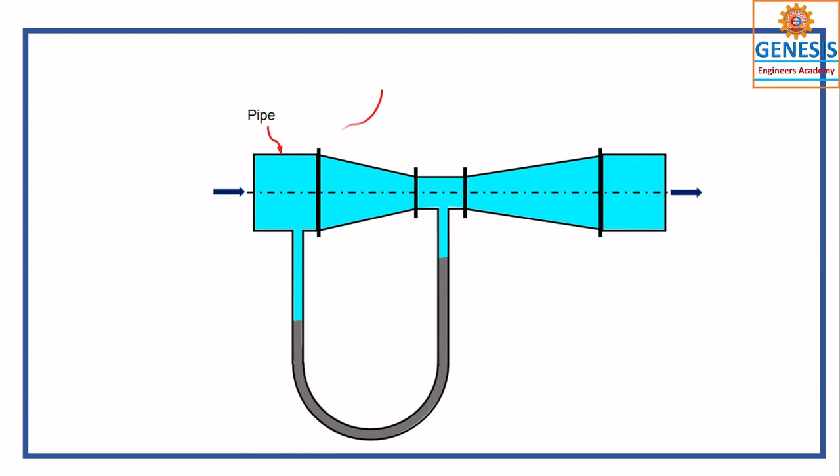In this video, we are going to discuss discharge measuring devices called Venturi meter. It is a device used to measure the flow using a theoretical formula.

This entire part is called Venturi meter. This part is assembled between two pipes, so the pipe length may be longer.

The Venturi meter initially primarily consists of a converging cone, throat and diverging cone. Converging cone, throat, diverging cone.

Together we call it Venturi, and these thick lines show it's a flange attached to both the pipe as well as this part of Venturi, and this is another part. These three parts are connected with the flanges called pipe flanges.

Next, this is a U-tube manometer. You can also call it a differential U-tube manometer. It gives the difference of pressure, the pressure difference. This is called pressure head.

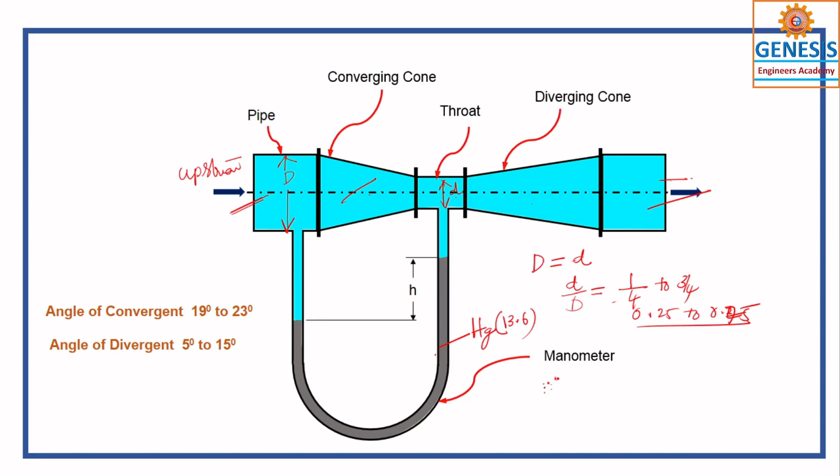This is the manometer, also called a differential pressure head measuring manometer. The manometer is used to measure the pressure difference and single pressure for that matter.

Here, one more thing I have to tell you: this throat diameter and its height, or otherwise diameter and length - suppose the pipe is like this one, throat, its length is also d and its diameter is also d.

d varies between, that is d by D varies between 1 by 4. That means you have to reduce the diameter, minimum is 1/4. That is, if the diameter is 4 times, one part is the throat diameter - if 4 is that, you can take 3 parts, like that you can also assume. Suppose if D is equal to 100, small d will be 25 or 75. So in between you can take, based on the efficiency of this Venturi meter.

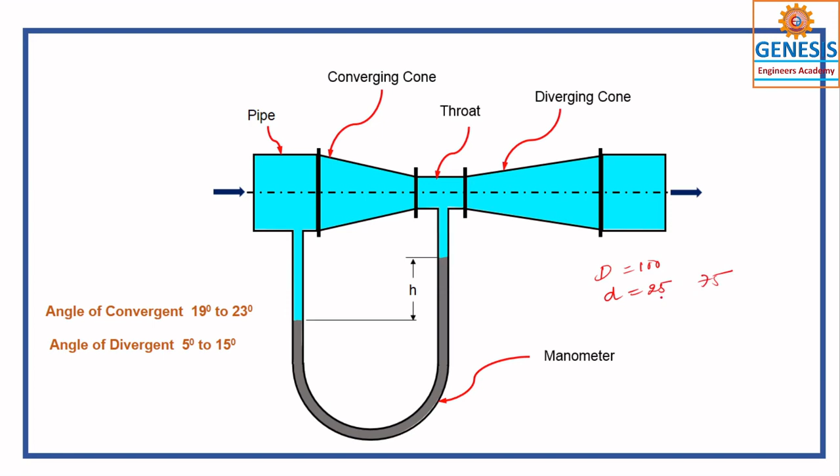This Venturi meter basically depends on Bernoulli's principle, where the total energy of the system is constant. Bernoulli's principle depends upon the law of conservation of energy, so it changes from potential energy to kinetic energy, or kinetic energy into pressure energy, like that.

You have to take this center line as a reference, from that you can take what is called the datum head.

Now, how I use this Bernoulli's principle to measure this one theoretically - so this is another thing, I am concentrating only on 2 parts. Bernoulli's principle always applies between 2 points, that are of your own interest. Here I am taking the velocity of the fluid, here is velocity, that is V, and this is the pressure.

So we mainly concentrate on pressure and velocity. These are going to exchange their energies. This is the converging part, and if you observe this one, it is a tapering one.

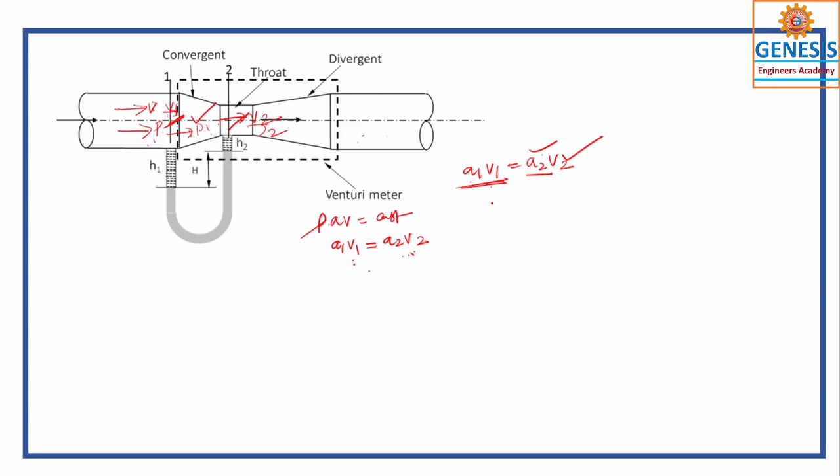So I will redraw that. This is the converging part. I take this as section 1, and this is the throat. You can take it anywhere, or otherwise you can take it as section 2. What does Bernoulli's equation give us?

That is pressure head, that is P by gamma. Next is velocity head, that is V square by 2G. The next one is datum head. Pressure head, velocity head, datum head is constant.

That is Bernoulli's equation. This formula must be applied to section 1. When applied to section 1, this equation becomes P1 by gamma plus V1 square by 2G plus Z1 is equal to, for section 1. And the same thing has to be applied to section 2 also, that is P2 by gamma plus V2 square by 2G plus Z2. In this way you can apply the Bernoulli's equation.

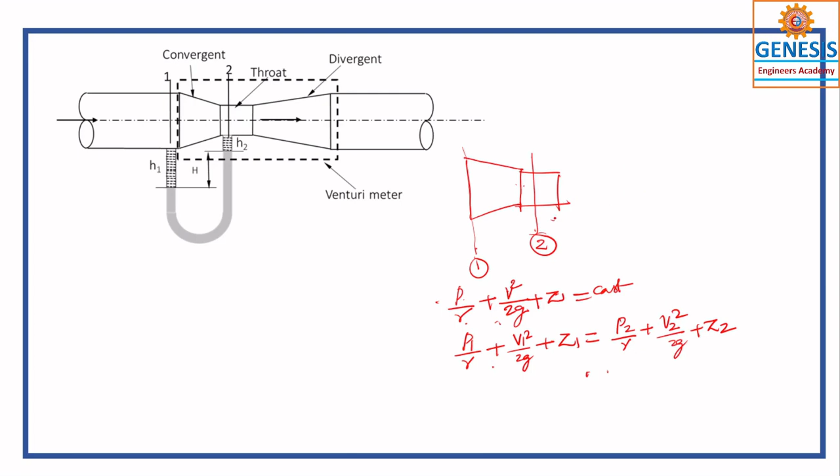So now if I wanted to apply that, where is Z? Z is not there. Here the velocity is V1, pressure is P1. Here the velocity is V2 and pressure is P2. At this junction, V1 is somewhat lesser than this one.

Why? Because here the area is A1 and here the area is A2. These two are same because the diameter is same, uniform, that is why velocity remains constant here. So I have found that V2 is greater than V1.

So what happens to this pressure? What is the status of P1 and P2? Does pressure increase or decrease? How do you know that? Using Bernoulli's principle.

Before doing that, one more thing: whenever you want to apply this principle, you have to take the same reference for all these things. This is Venturi: converging part, throat, and diverging part. So I have to take the same reference, and this is applied. This is the centroidal axis of this one. So if you apply here, you got my point.

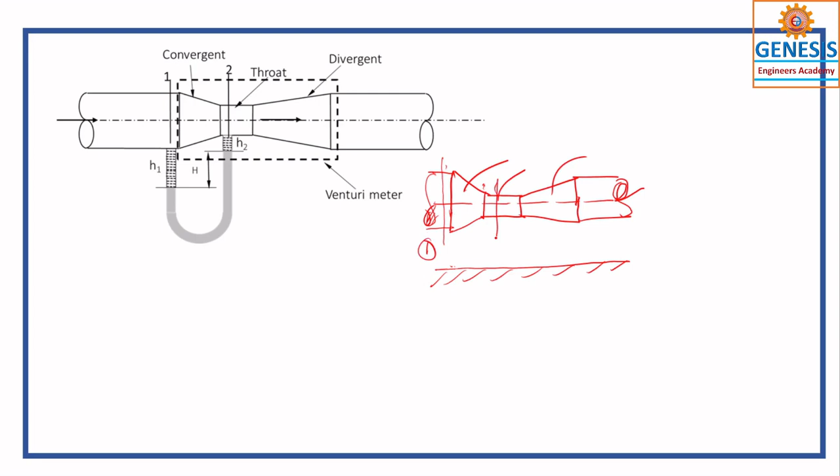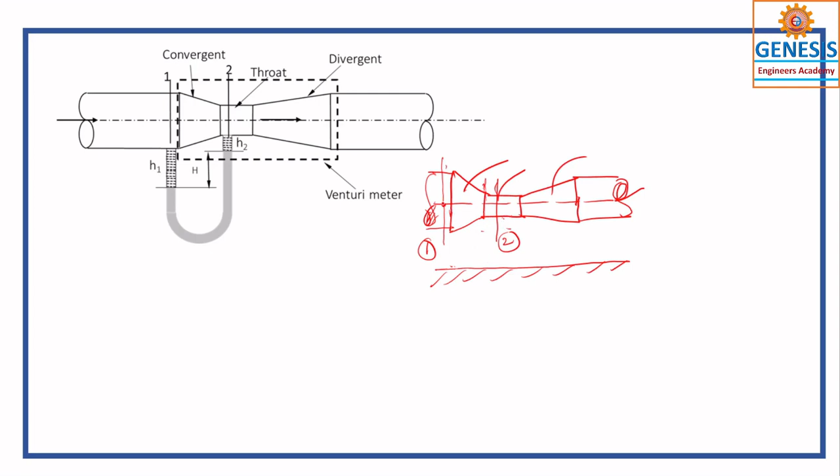So this is section 1, and this is section 2. This section 2 can also be applied here, but instead I have taken this one, from this point, center, to this reference. Any floor, any building floor, anything you can take as horizontal.

So this is Z1, that is the elevation, otherwise called the datum head. At this point, if I draw a vertical line, this may be Z2. Since this axis and this are parallel, Z1 is equal to Z2.

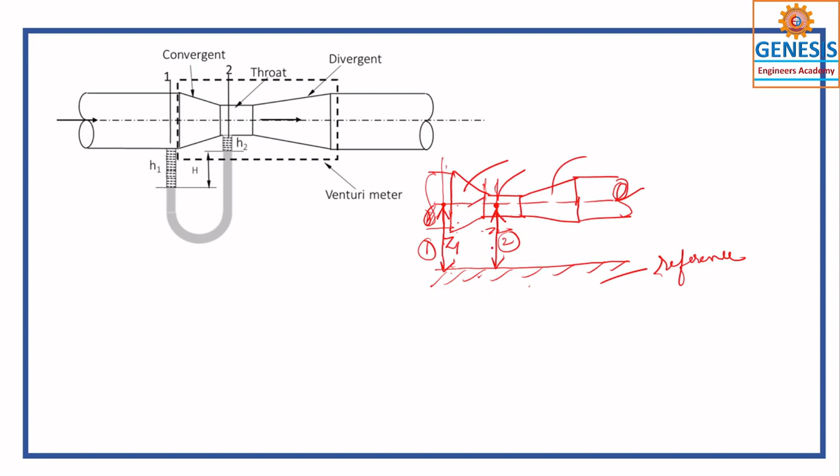If I write the equation once again: P1 by gamma plus V1 square by 2G plus Z1 equals P2 by gamma plus V2 square by 2G plus Z2. Since Z1 equals Z2, I can cancel those. So this P1 by gamma plus V1 square by 2G equals P2 by gamma plus V2 square by 2G.

You understand? So these are the initial values. What happens to P2? V2 is increased, so this is increased. To balance this, whatever increment it has got has to be sacrificed here. That is, we got this velocity increase, meaning kinetic energy is increased, so the pressure energy must be decreased. If V2 is greater than V1, then P2 is less than P1.

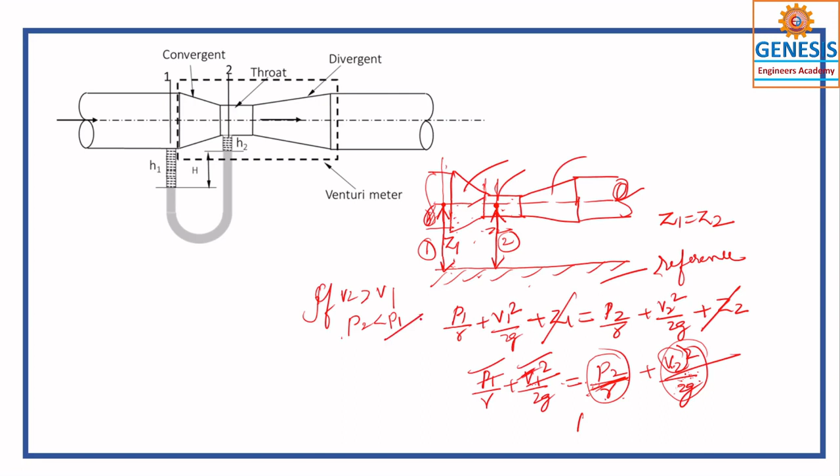So that is shown here, P1 is greater than P2. I will explain from this diagram. Here this is the pressure P1 and here the pressure is P2. Since P2 is lesser and the fluid moves to lower potential, that is lower pressure, since it is more pressure it applies the pressure and the mercury column will come down and this side will go up. In order to measure this, we have designed this thing so that velocity is increased by decreasing the area.

If pressure is here, I will explain once again. If I put this Venturi meter, that is mercury or otherwise manometer, here I take this as point 1 and point 2, and here P1 is something, P2 is something. So if P1 and P2 are the same, in this case the mercury will show the same level at same pressure, so there is no difference, there is no H. So this difference of pressure must be arranged.

That is why we have designed this as a converging section, so velocity is increased, thereby pressure decreases. Because the pressure is decreased, this side moves up, and thereby we get this H. Until we design it like this, the columns will be in between. So initially this amount is going down and this part goes up. You got my point? That is the thing you have to understand in Venturi meter.

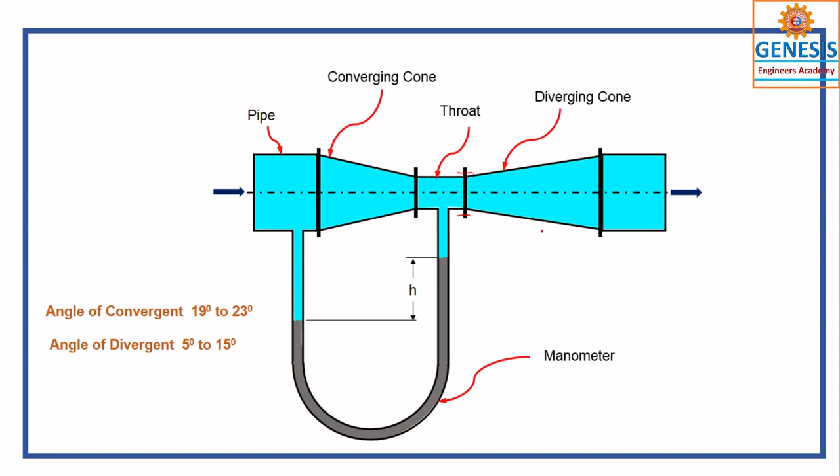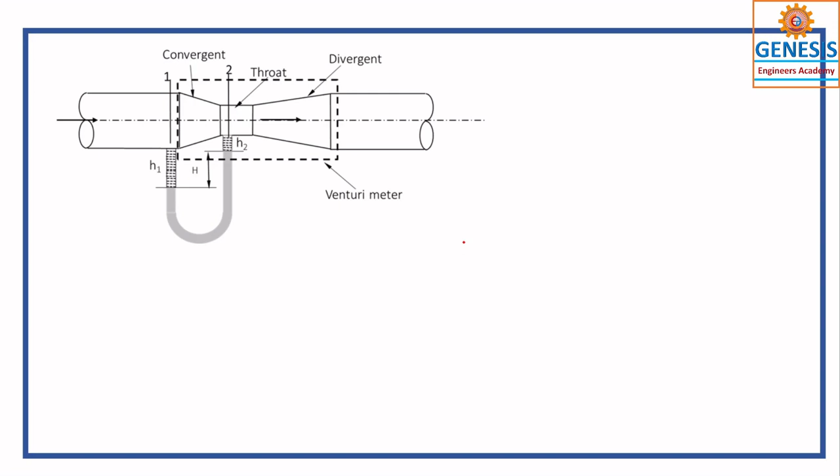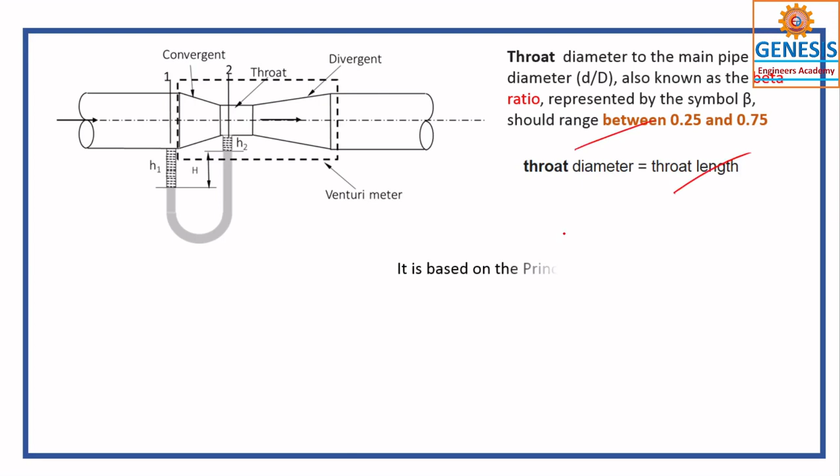For diploma holders, the derivation is not needed, but don't skip it - you learn this derivation so that you become a master expert of that. So this same thing I have given to you. This is throat diameter equal to throat length, and this Venturi meter is based on Bernoulli's principle or otherwise Bernoulli's equation. Next, as I told you, Z1 equals Z2, and this is the same reference.

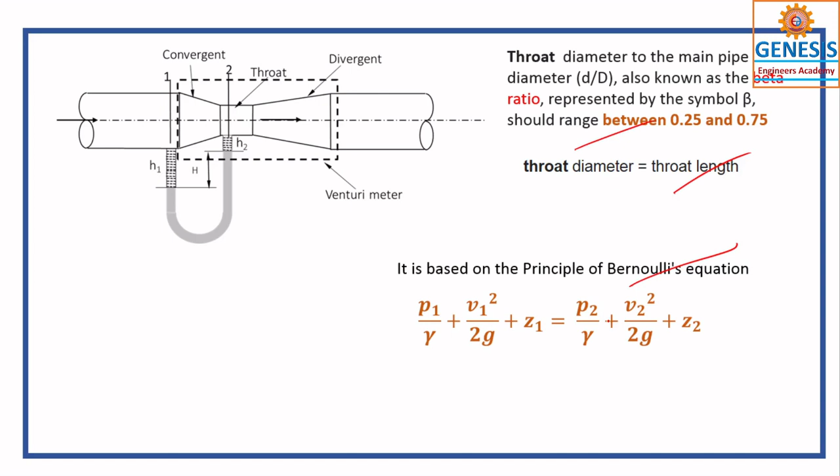You can take, as I just explained, this is Z1 at point 1 and this is Z2. Since it is horizontal, Z1 equals Z2. If there is a difference, you have to put that in and you are going to get the same thing. So it doesn't depend upon the elevation. It all depends upon the geometry of this cone, that is converging cone and diverging cone, and the diameter of the throat also.

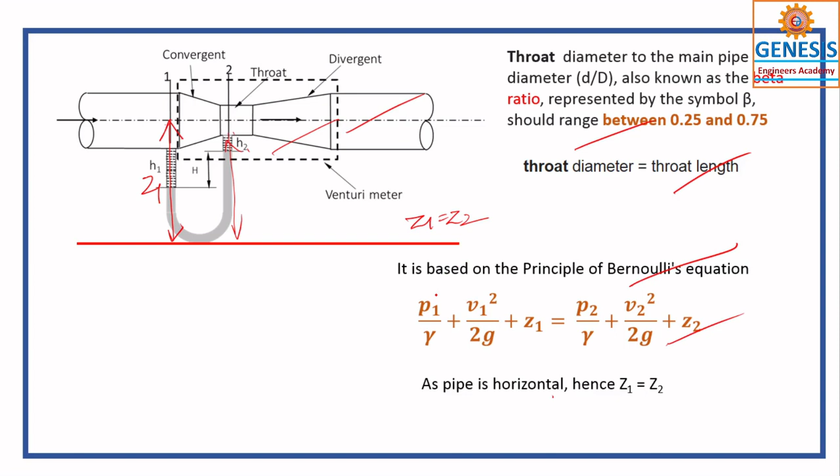Now I have brought all the pressure items to the left side. This pressure difference between pipe and throat is the difference between these two points: the pipe's final point at the start of the converging cone, and the starting point of the throat, which is the ending point of the converging cone. That difference is H, as shown in the figure.

So H is equal to V2 square minus V1 square by 2G, taking the LCM as 2G. Now I know the continuity equation can be applied, that is A1 V1 is equal to A2 V2. So I have to replace V1 or V2. V1 is equal to A2 by A1 into V2. I can replace V1 by V2, or do it either way.

So I replace V1, and H becomes this. Taking 2G outside, V1 square equals A2 by A1 whole square into V2 square. Taking that outside, V2 square by 2G equals A1 square minus A2 square by A1 square. Are you following me? Now, what is V2? From this, V2 is equal to A1 by under root of A1 square minus A2 square, into 2GH.

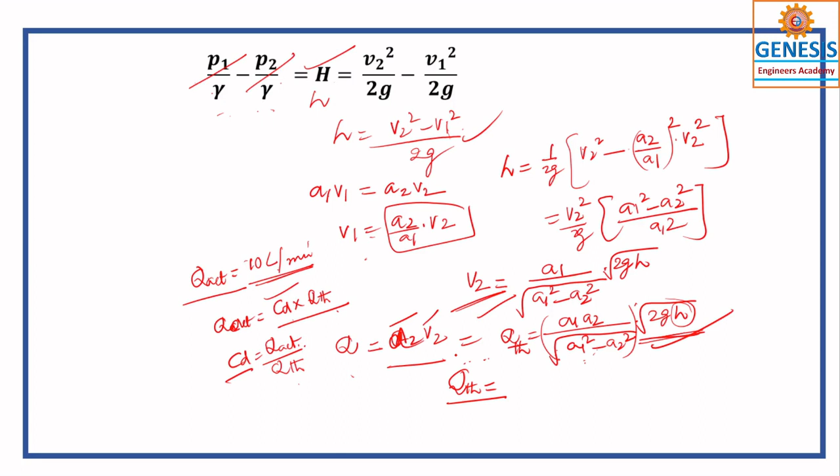So that is what you have understood. This is the formula I have just derived. For a venturimeter, this CD varies between 0.95 to 0.99. That means CD is equal to Q actual by Q theoretical. If it is 0.99, that means it is almost 1, so this is the most efficient device to measure discharge.

There may be questions in competitive exams like APPSC, SSC, or GATE asking what is the value of this coefficient of discharge. It varies for a venturimeter between 0.95 to 0.99, or you can take the average in between, so 0.97 is also an average value of this.